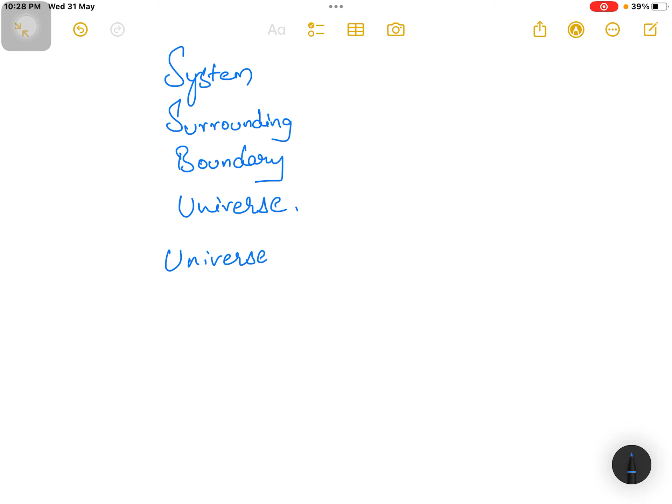So now moving further, what is the difference between a surrounding and environment?

Suppose I am taking a stove and I am lighting it up. What happens is, when I am lighting it up, only the temperature of the immediate part of the system changes. Here, what is the system? The system is candle or stove, whatever it may be.

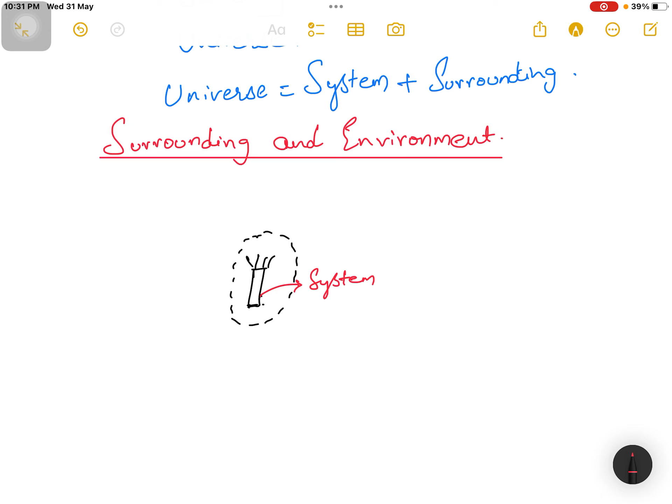Suppose in a room now you are lighting the stove, the total room doesn't get affected. Only the immediate part of the stove gets affected and the temperature changes. Means the properties of this immediate part only get changed, this part.

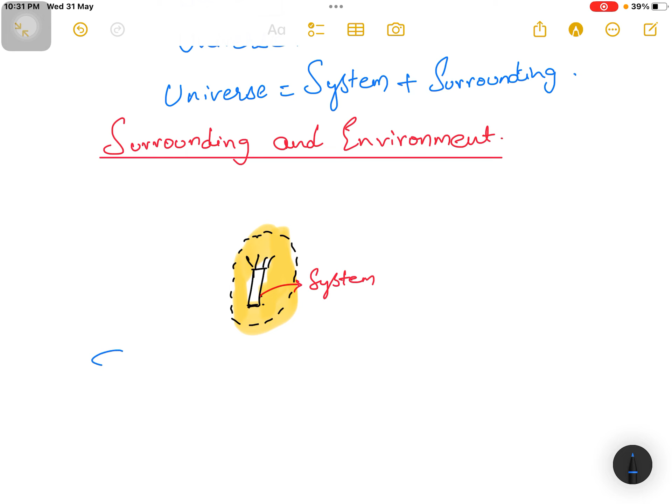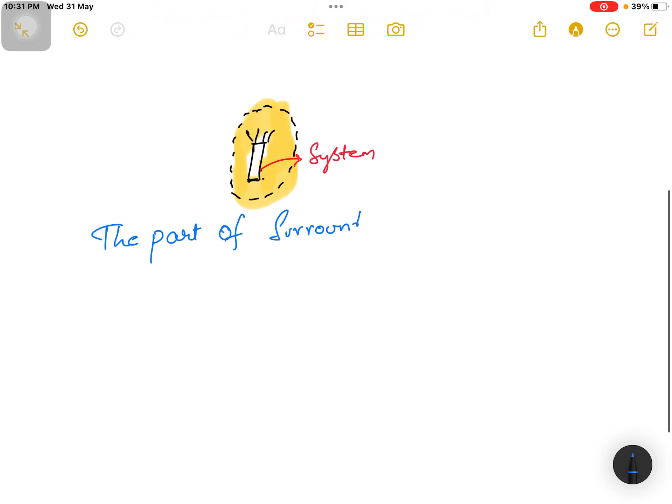So now I can define it as the part of surrounding where the intensive properties change during energy interactions is known as immediate surrounding.

In surrounding, the remaining part doesn't change. The intensive properties don't change. Where the intensive properties don't change is known as environment. As I told you before, this is the immediate surrounding, and this remaining part, this remaining part is the environment.

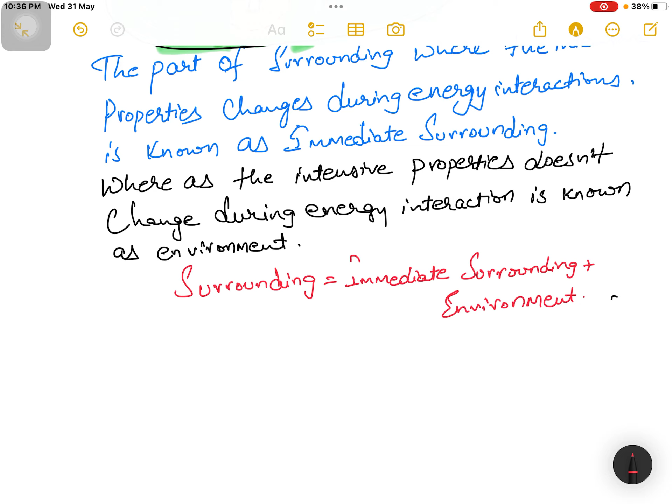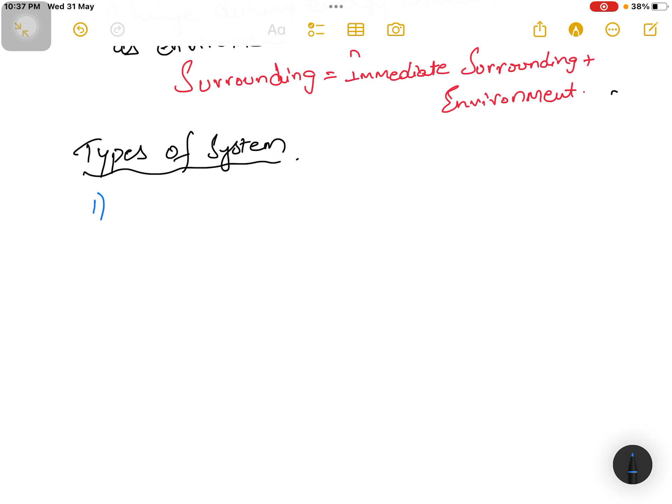Now moving further, types of system. There are three types of system. One is closed system. Second one is isolated system. Third one is open system.

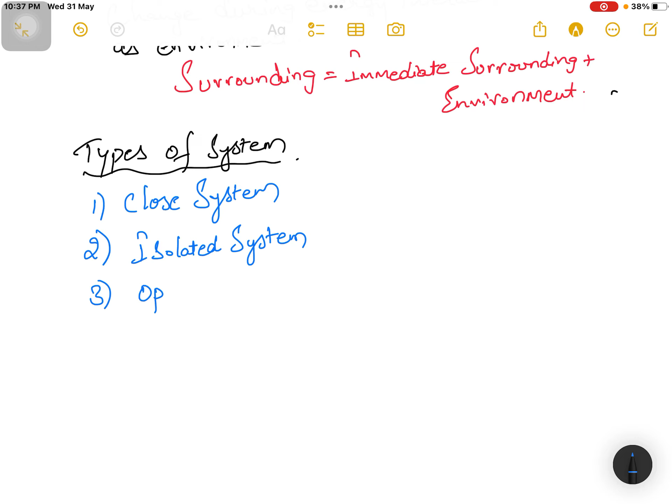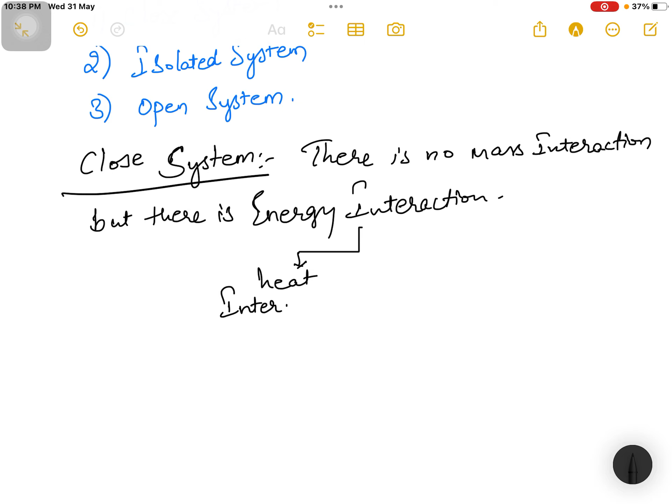Now we will discuss closed system. Here what do you mean by closed system is there is no mass transfer or interaction, but there is energy interaction. Here energy interaction means heat interaction or work interaction.

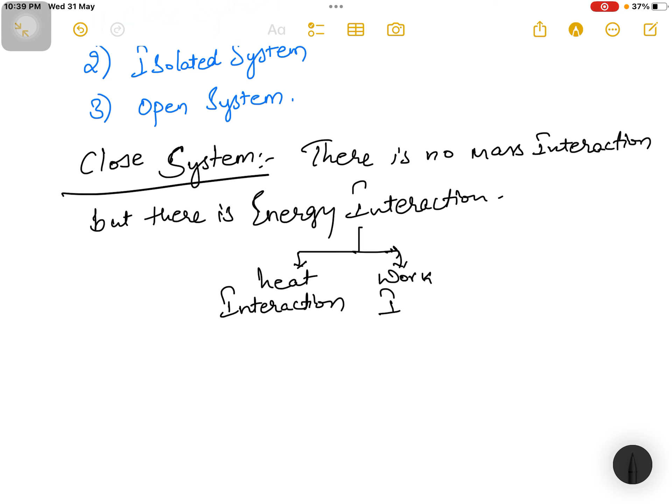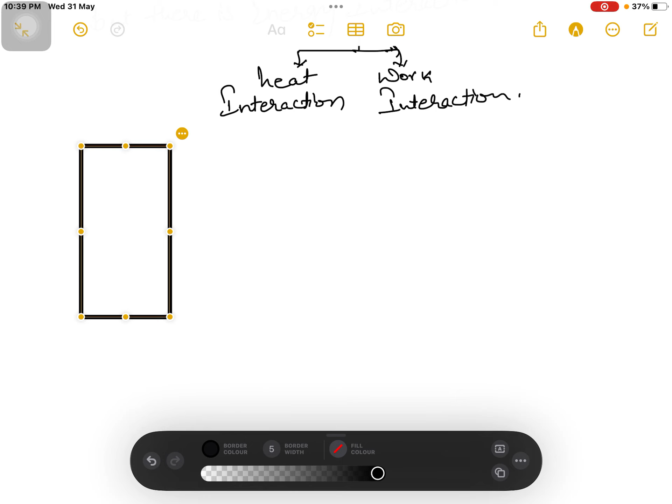Okay, now moving forward, I am taking a container which is filled with air. And here the air is the system. I am considering air as a system. And this is the internal boundary of the system. Suppose the mass of the air is m1 and the temperature of the air is T1.

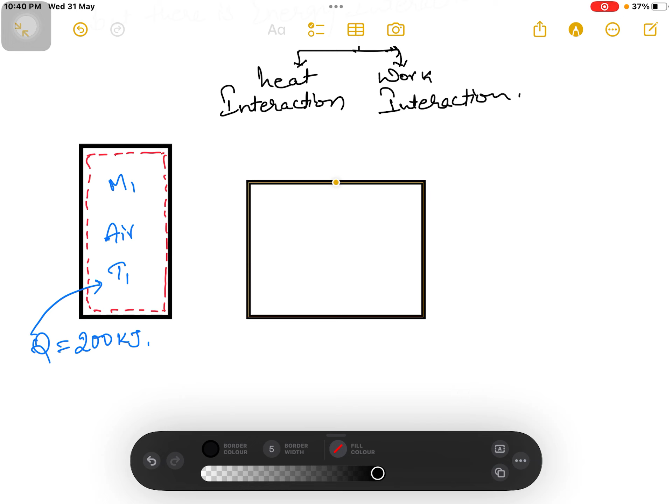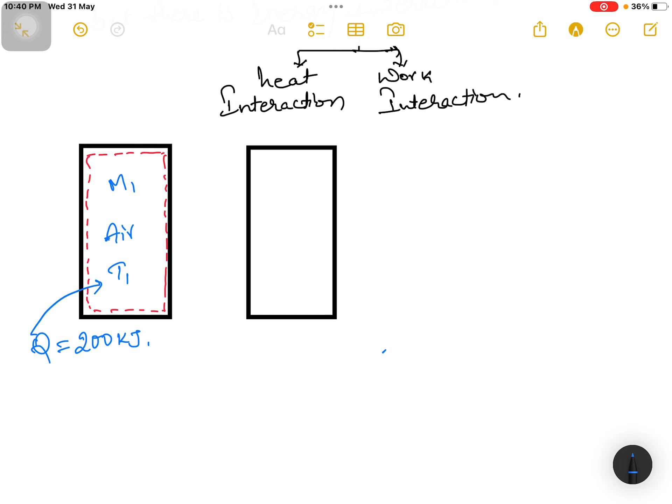Now I am supplying heat of 200 kilojoules to this system. What happens further is the temperature increases but the mass remains same. Why? Because the boundaries are rigid. Air is the system and the temperature changes to T2, and the boundary of this is the boundary of the system.

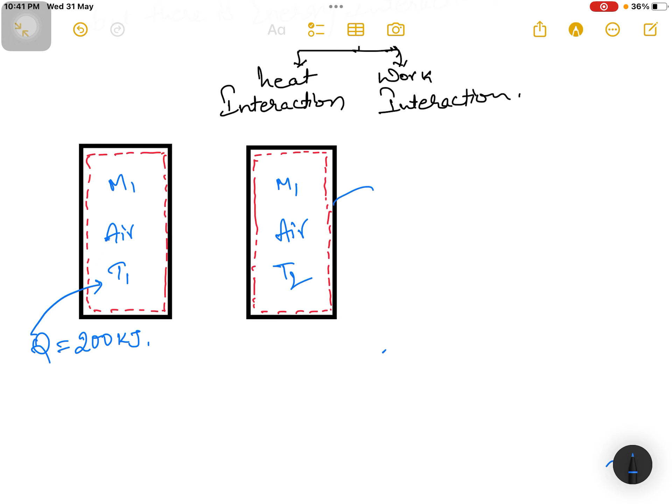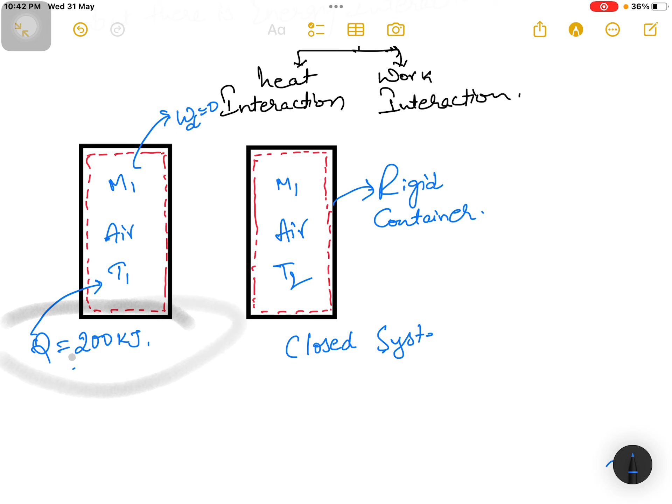Okay, this is the rigid container. When I am supplying heat to the system, with 200 kilojoules of heat, the temperature changes but the mass remains same and there is no work done for this system. So the displacement work of the system is 0. So I can conclude, closed system having rigid boundary.

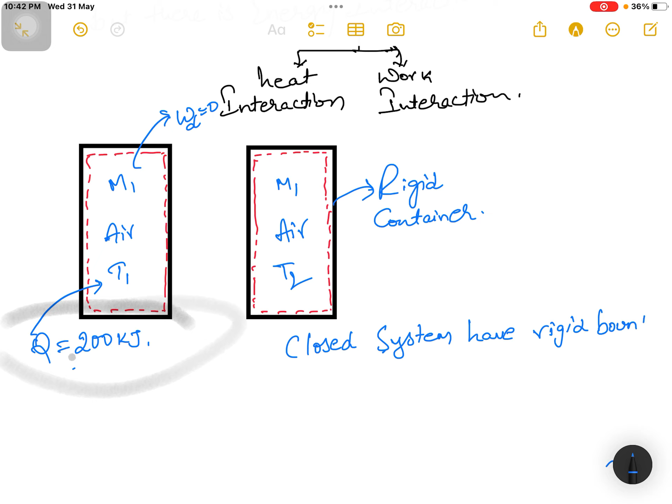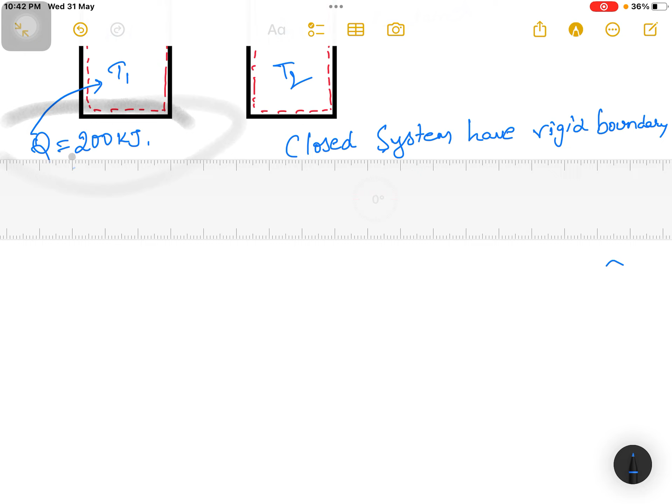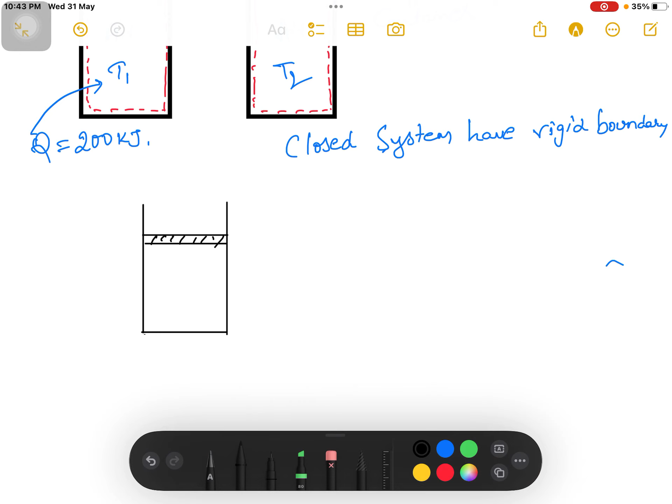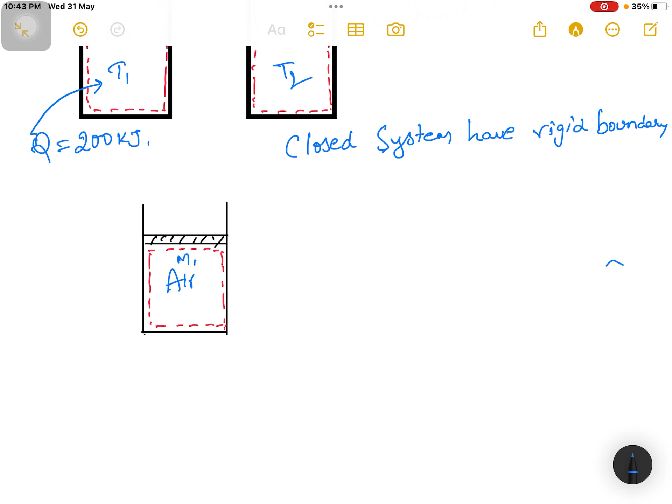Now moving further, I am taking a piston cylinder arrangement which is filled with air. Here the system is air. And this is the boundary of the system. Suppose the mass of the air is m1 and the temperature of the air is T1. Now I am supplying heat to this air with 200 kilojoules of heat.

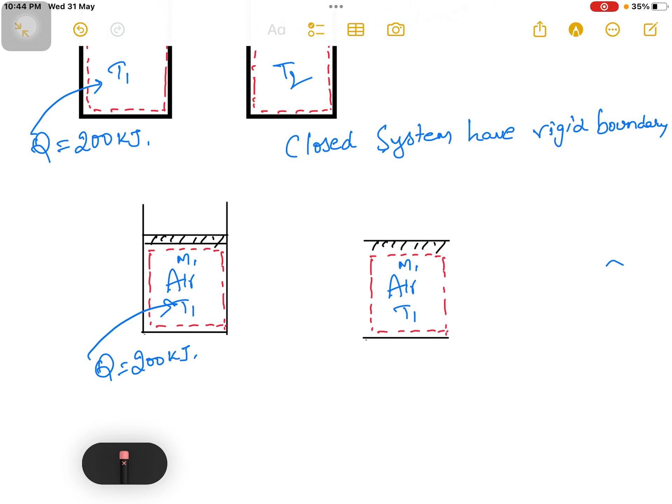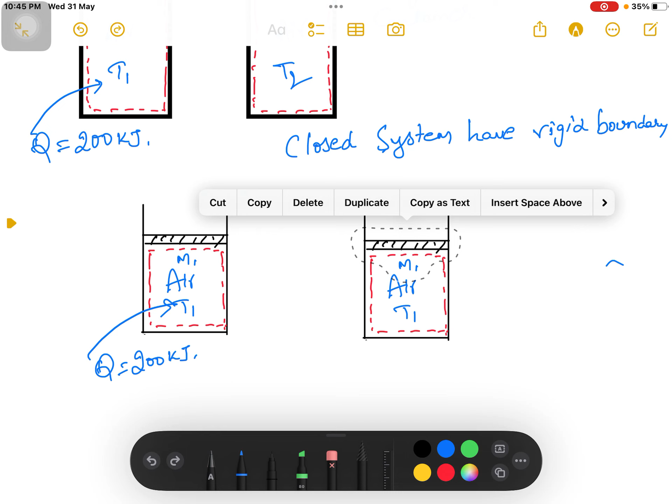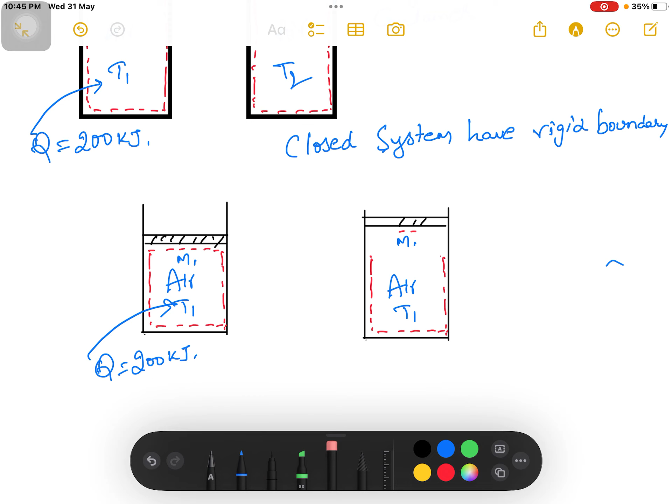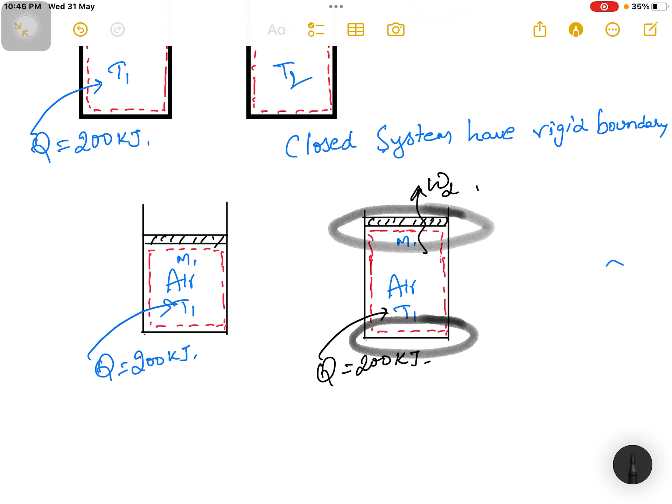What happens further is the temperature of the air increases and the piston rises. This is the boundary of the system. What happens is the piston rises when I am supplying heat. It means there is some work done by this system. The boundaries remain same at the bottom and below the piston, but there is a change at the curved surface of the boundary.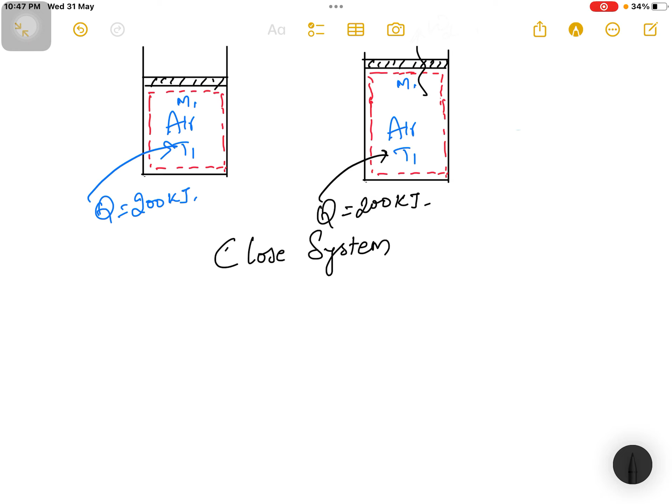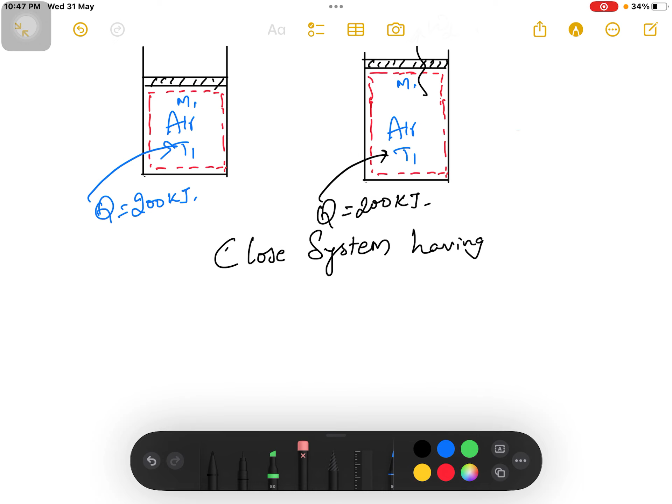For the closed system, the boundary is flexible and there is some work done. Now I can write here, closed system having flexible boundary.

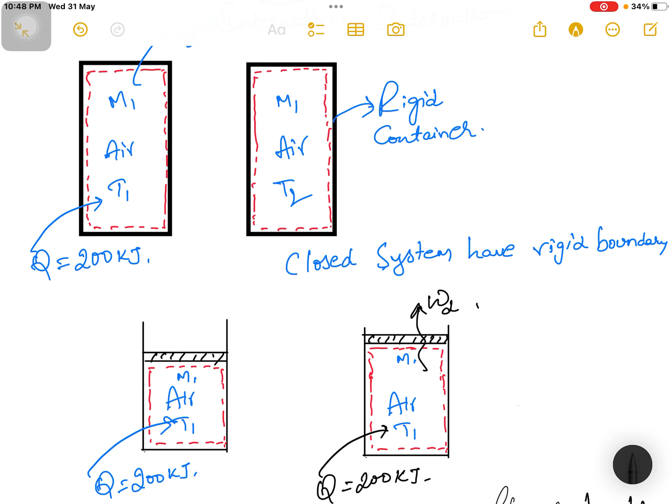Okay, here in these four diagrams, what we have observed is there is energy interaction taking place, but there is no mass interaction. Here I can conclude that we sometimes call closed system as a control mass also.

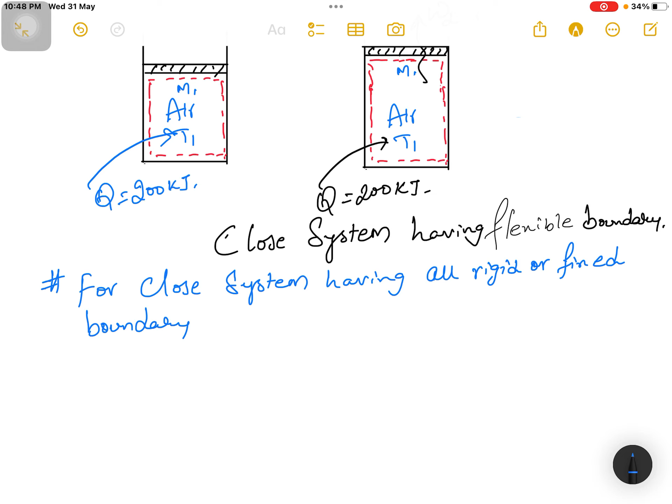So now, for closed system having all rigid or fixed boundary, the displacement work is 0. As I told you before, sometimes we use closed system as control mass.

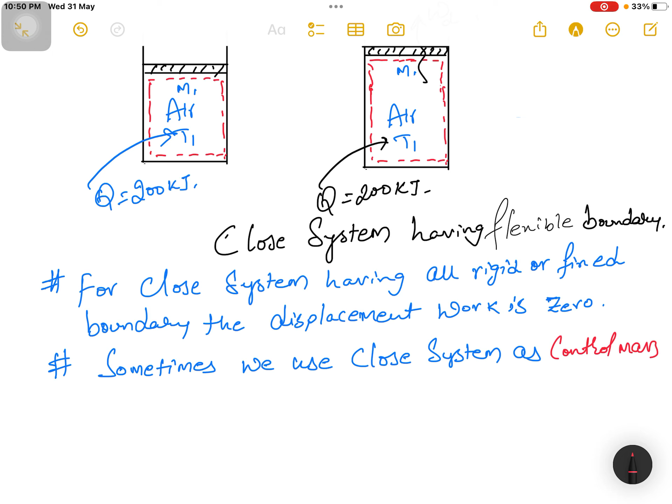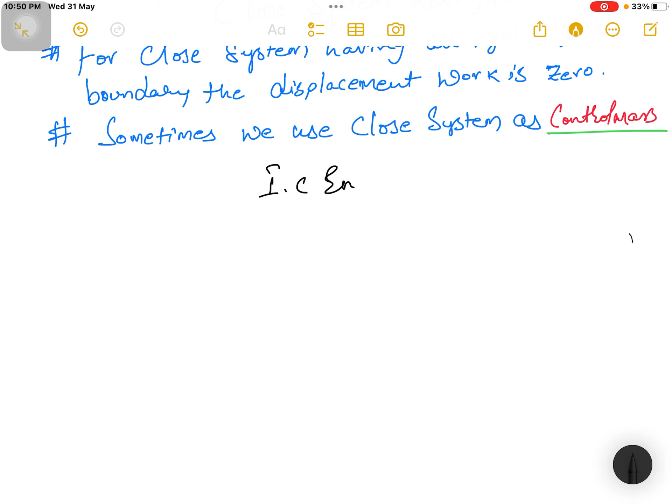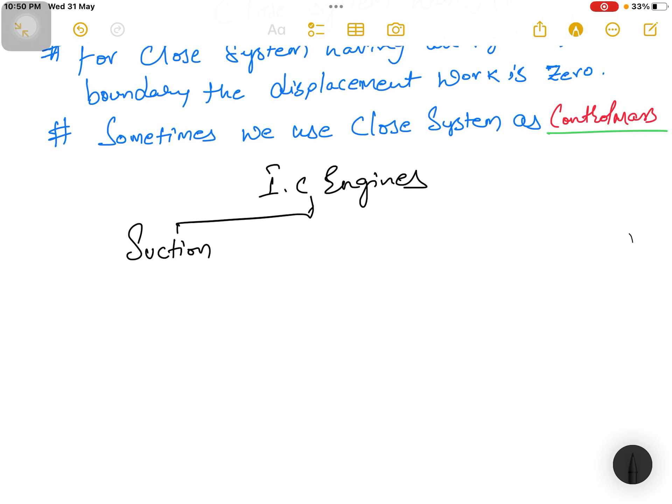Okay, if you have any idea about IC engines, it takes four processes to complete a cycle. One is suction, second one is compression, third one is expansion, and the final process is exhaust.

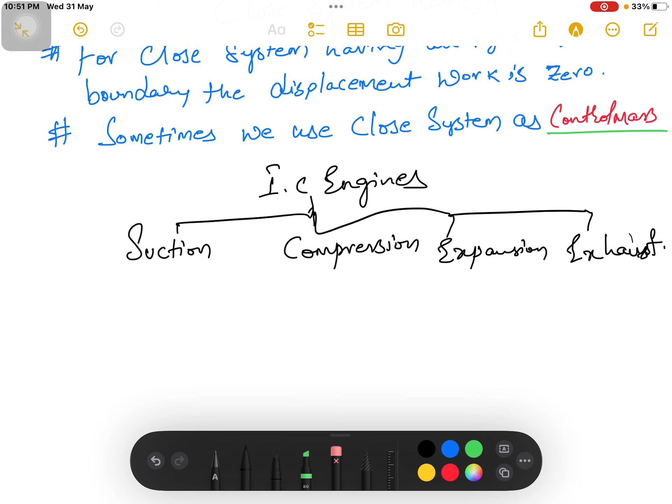Okay, in compression and expansion process, the fuel air mixture or the air which comes inside the cylinder remains the same. So now I can tell that these two processes behave as a closed system.

Okay, and the third point is the compression and expansion strokes of an IC engine represents a closed system.

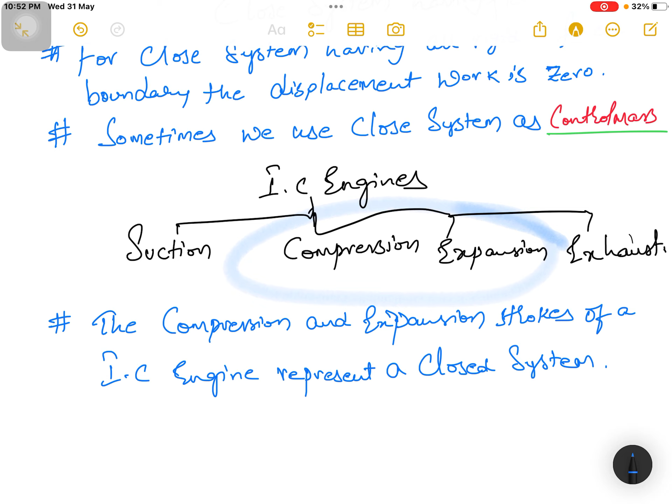This is all about the closed system. Now moving further, isolated system.

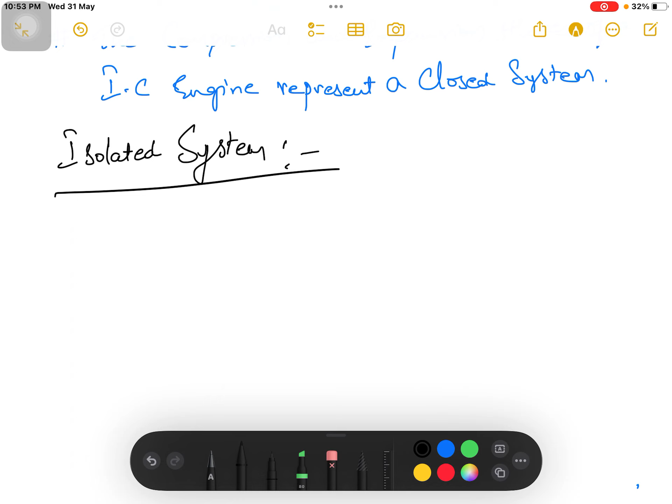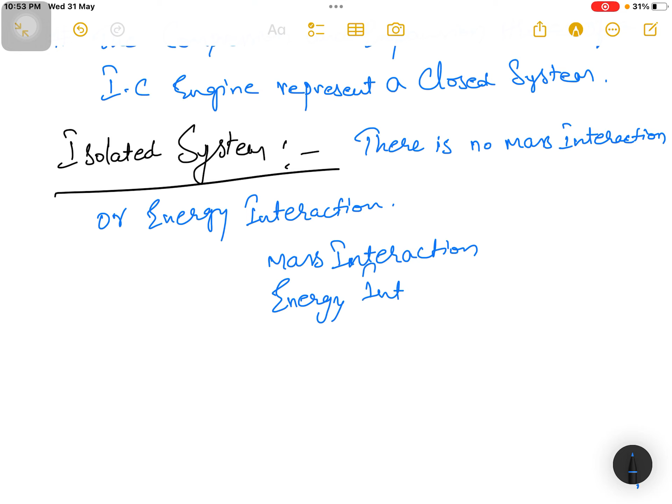What happens in isolated system is there is no mass transfer or interaction, or energy interaction. Means there is no mass transfer interaction and no energy interaction. Nothing takes place.

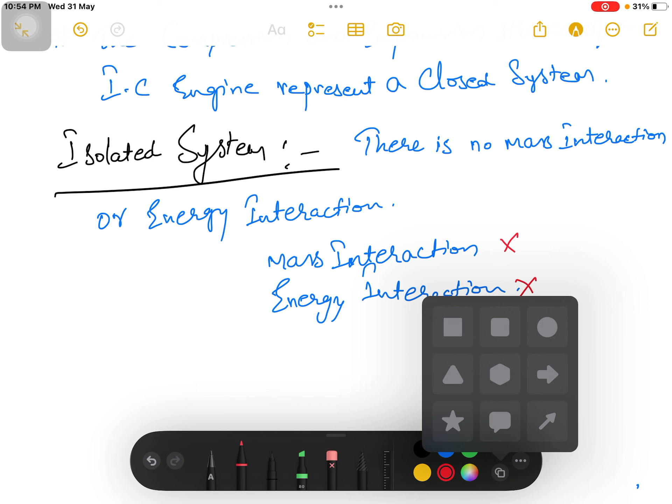So now I'm taking a piston cylinder arrangement or a rigid body. First of all, this rigid body is containing air, and I am considering air as a system. Suppose the mass of the air is m1 and the temperature of the air is T1, and what I am doing is I am insulating this rigid container.

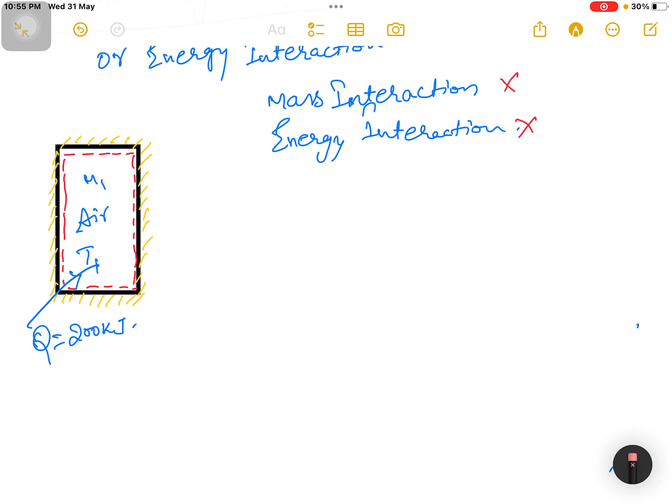Okay, now I am supplying heat of 200 kilojoules to this container. When the container is rigid and it is well insulated, there is no any energy interaction. When there is no any energy interaction, there is no displacement work. So I can tell that this is an isolated system.

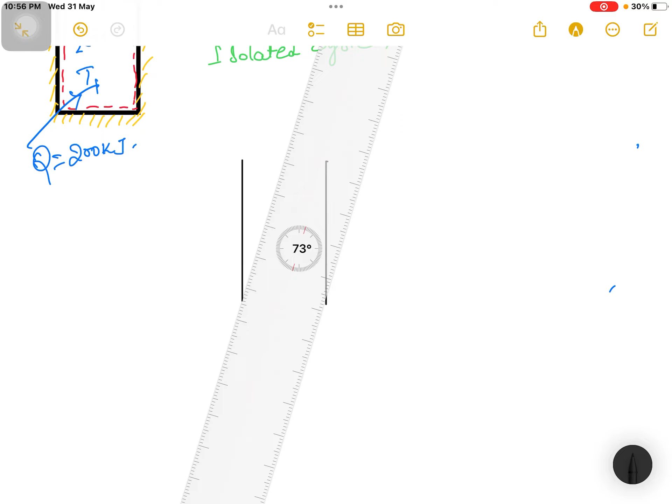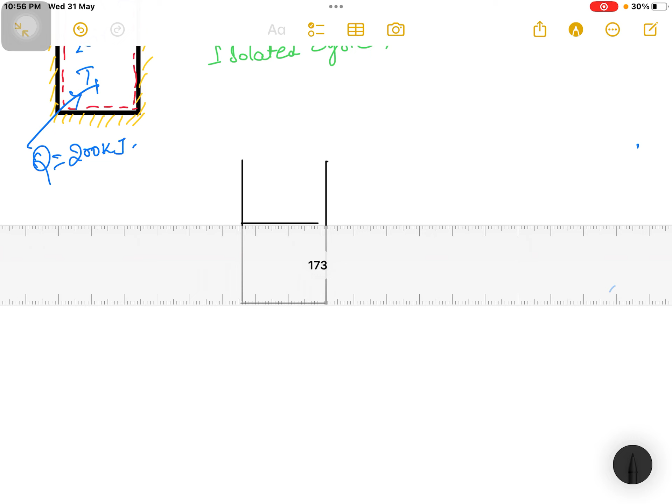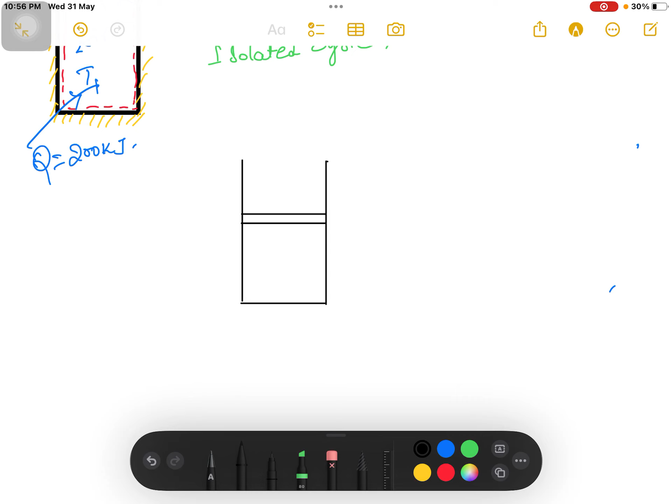Now moving further, I am taking a piston cylinder arrangement, which is well insulated.

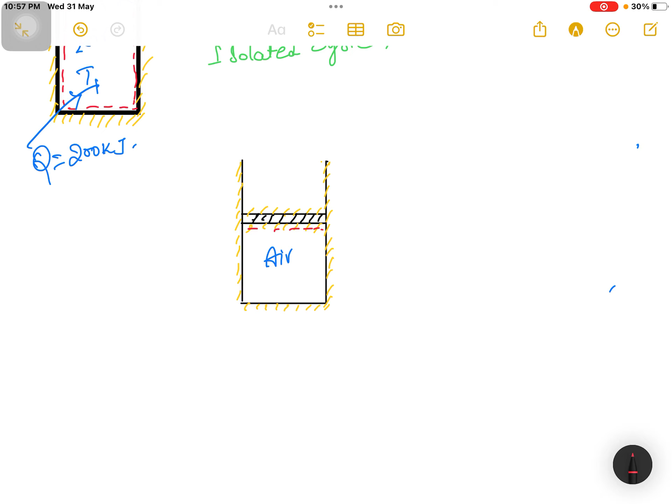Here the air is the system which is having a mass M1, and the temperature of the air is T1. Now I am supplying heat of 200 kilojoules. There is no mass interaction, but the piston have the power to displace.

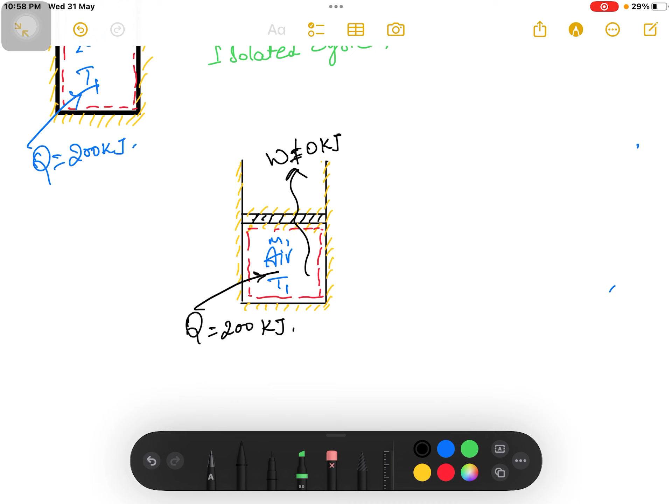So the piston has the tendency to move up or down. So there will be a work displacement, means there is work interaction. Okay, some work done will be there. So the system is not an isolated system.

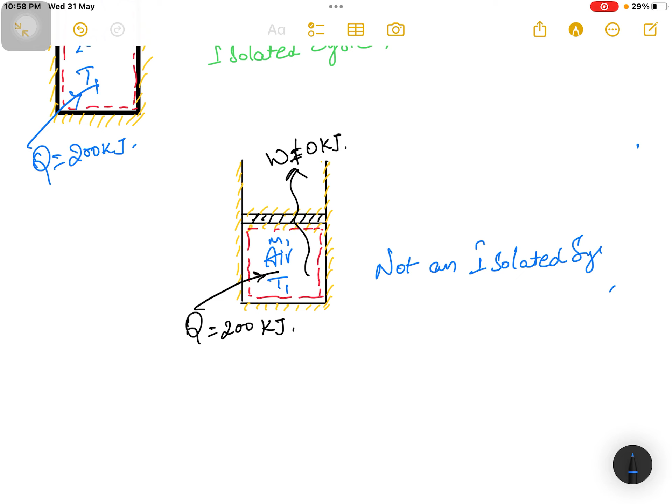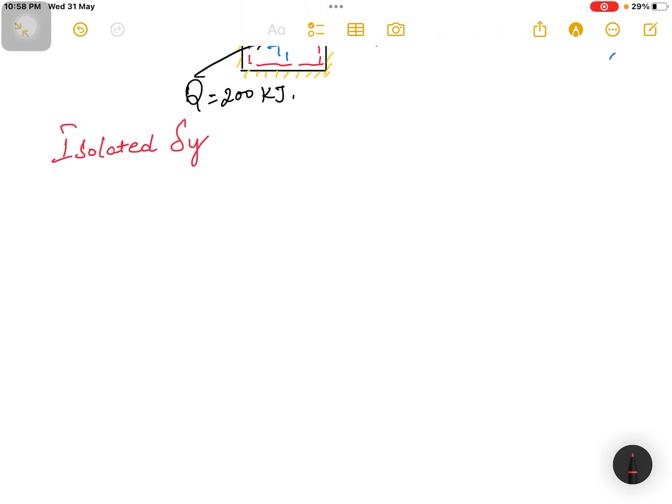Now moving further, isolated system and insulated system. Guys, please don't confuse isolated and insulated system.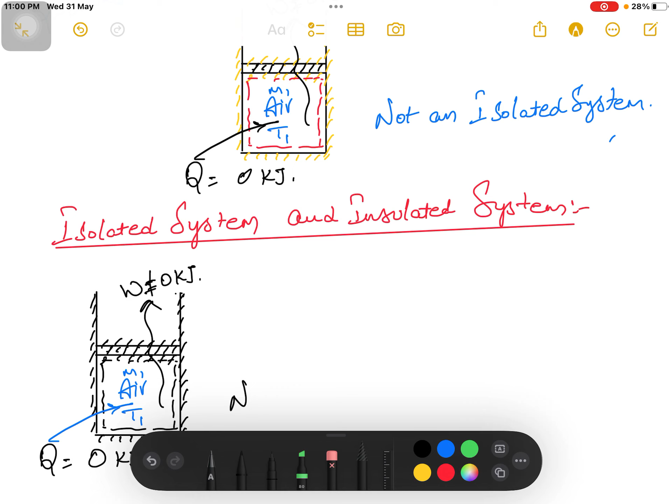Here air is the system, there is a mass and same has temperature. We call it an insulated system.

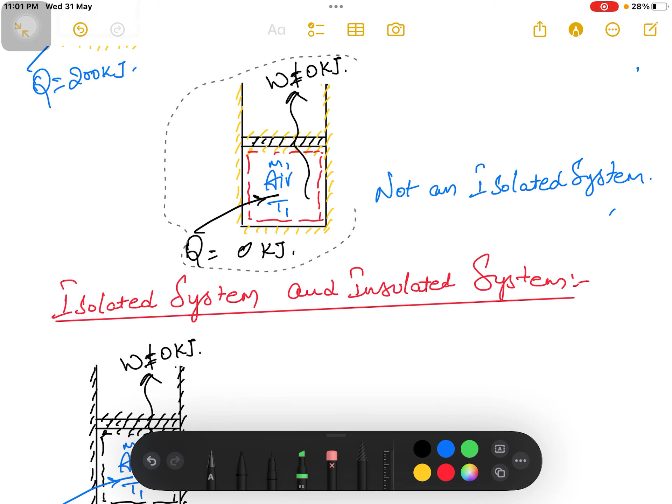Okay, now I am taking the same example to be an isolated system. What we have to do is, we have observed before that there is some work done. Here work done is not 0. Okay, to make the work done 0, what we have to do is...

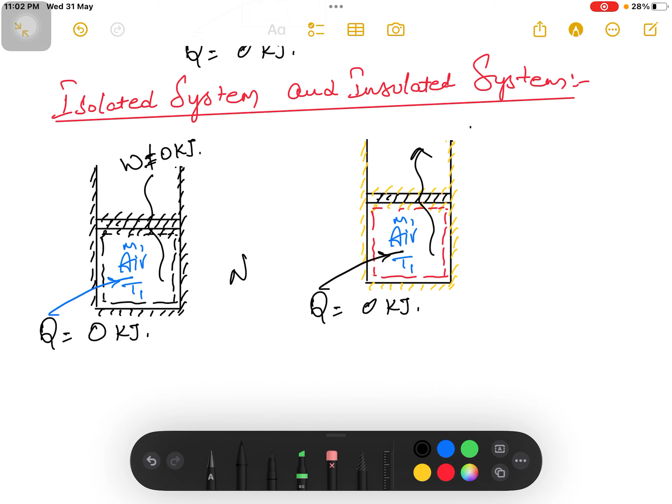...we have to apply stoppers. Okay, here the work done will be 0 when we apply stoppers, and the stopper is also insulated. Okay, this is an isolated system.

And this is an insulated system. Okay, and you have observed in the market we see a bottle. When we pour milk or any liquid item in that bottle, with some temperature, the temperature doesn't change. There will be no energy interaction and there will be no any work done. The bottle is the thermo flask as we see in our daily lives.

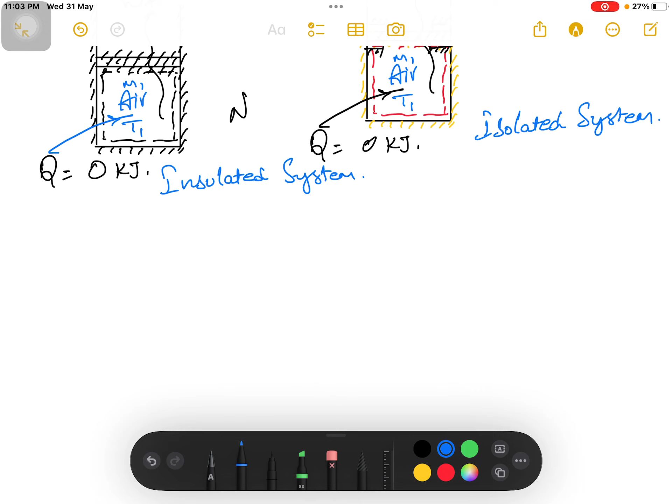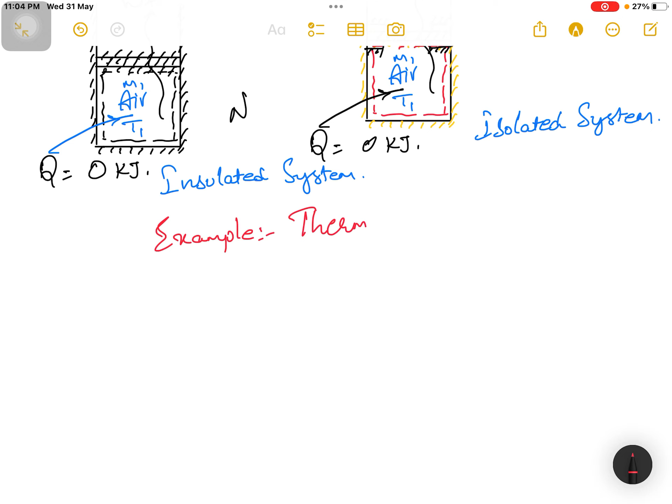Okay, here thermo flask for an isolated system, we can use thermo flask as an example. Or we can say an insulated bottle.

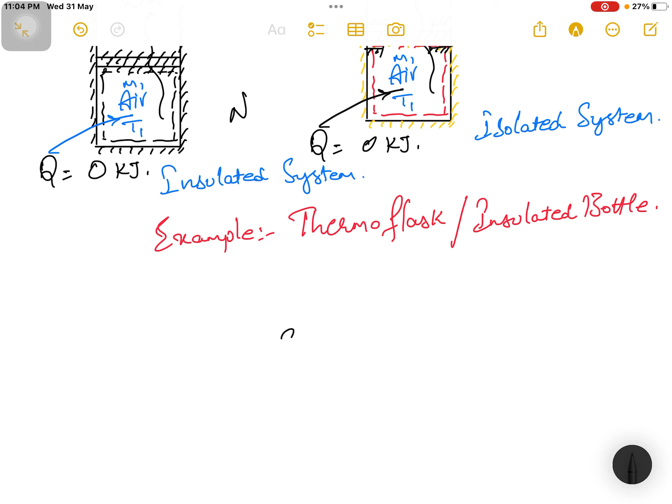Any other example? As we studied before, that system plus surrounding is the universe. This is the system and this is the surrounding, and this is the universe. Here universe also acts as an isolated system.

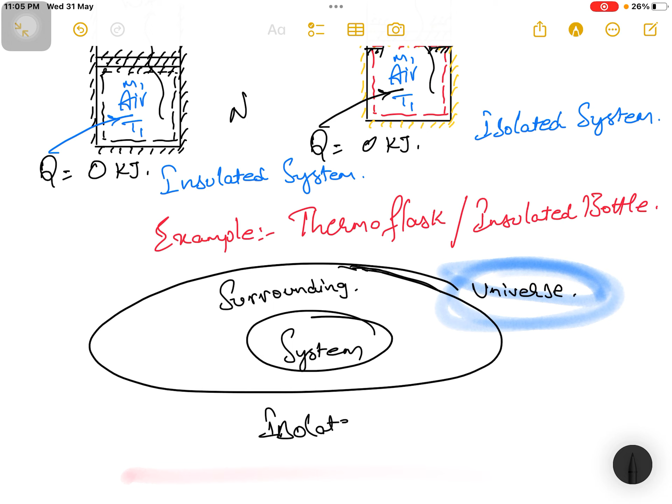So another example will be universe is an isolated system.

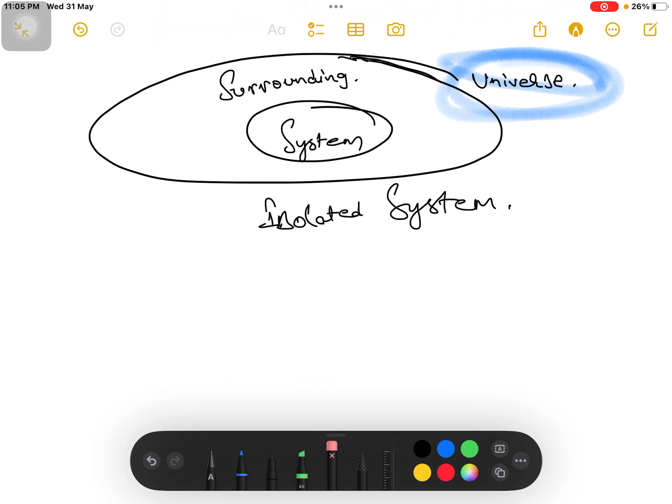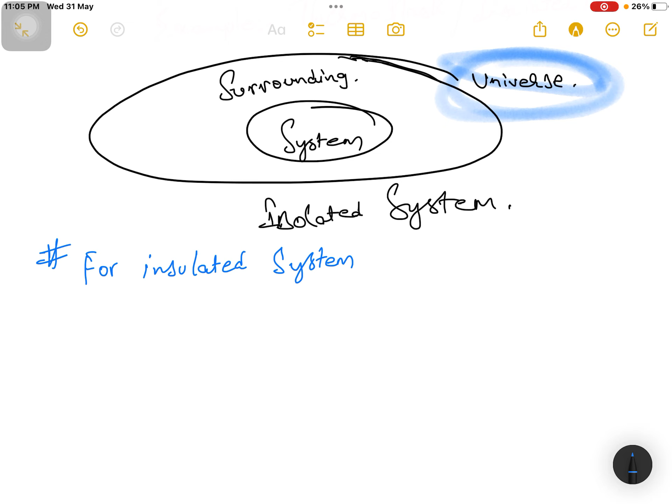Okay, so in the definition form we can write it as, for insulated system, heat interaction is 0 but work interaction can take place.

In the previous class, guys, we have studied that thermodynamics deals with energy interactions and its effects on the properties of the system. Here energy interactions means heat interaction and work interaction. In isolated system we have seen that there is no mass interaction and energy interaction. So we will not study further about the isolated system because there is no energy interaction.

Energy interaction means the heat interaction and the work interaction. Okay, since thermodynamics deals with energy interaction,

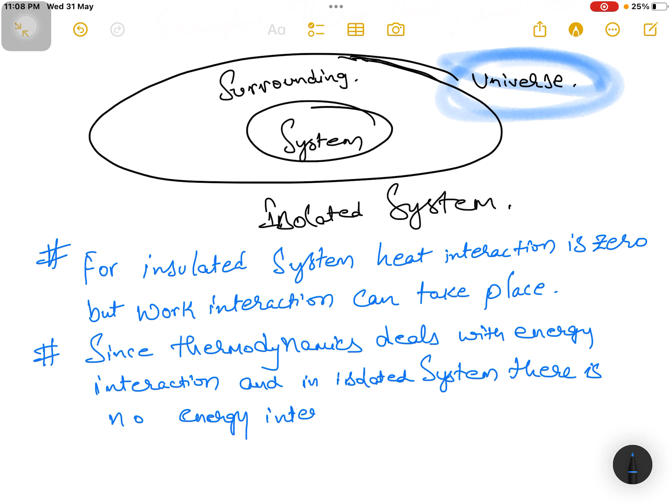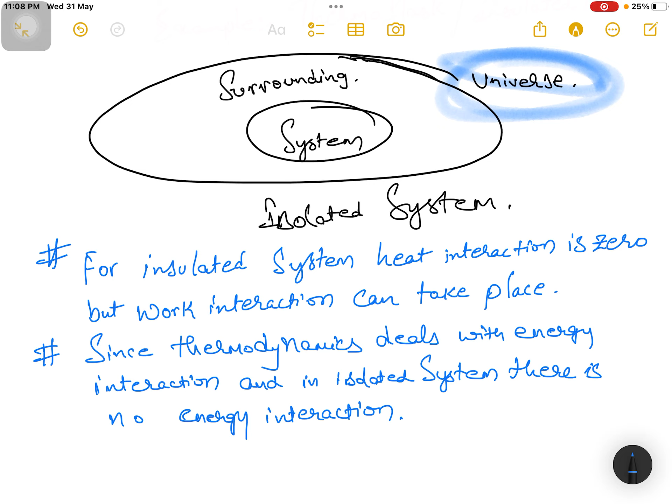and in isolated system there is no energy interaction, so we don't study it in detail.